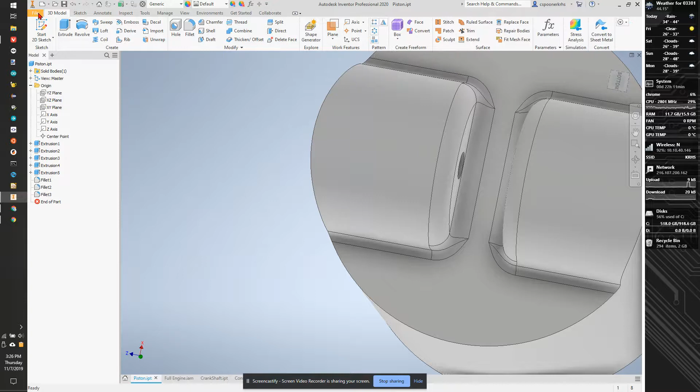So I'm going to start off with the piston. We're going to take File, Save As, Save a Copy As, STL. We don't need that. We do need the connecting rod, which is going to be special, and the crankshaft. So we open up our... hit cancel. Go to our full engine.

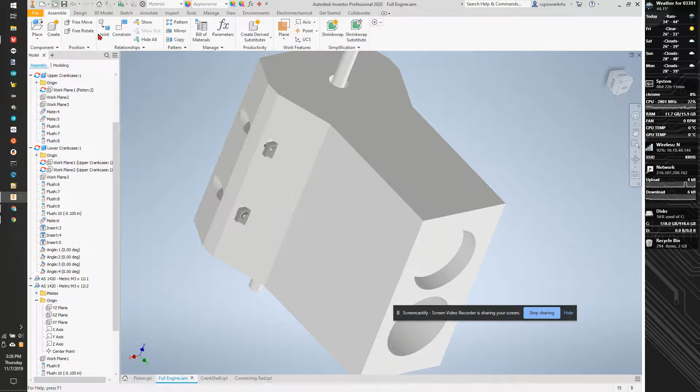Let's save this thing. It's asking me, do you want to add the save for the lower crankcase? We do. We're going to open up the upper and lower crankcase. So lower crankcase, upper crankcase. And I'm going to File, Save As, Save a Copy As, STL. File, Save As, Save a Copy As, STL.

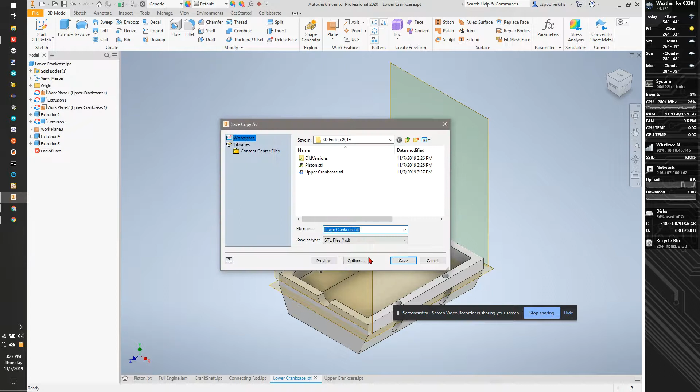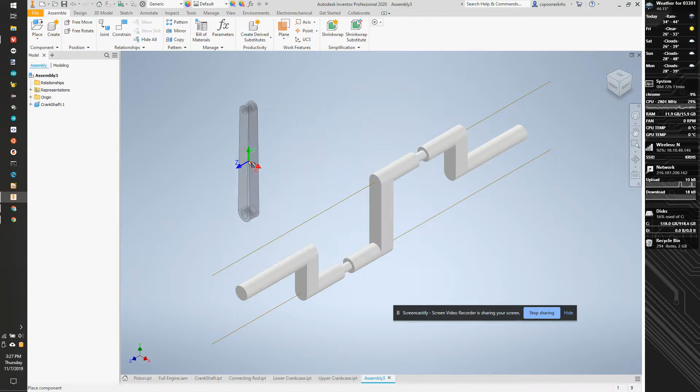And then we make a special assembly to print the crankshaft and rod. So I'm going to place the crankshaft in, and I'm going to ground him. And I'm going to place my connecting rod. We're going to place two of those in there. And we're going to constrain this axis to this axis.

Cancel, actually. Control Z, Y. Constrain. We're going to use insert just like we did last time. 0.005. 0.005. Same thing here.

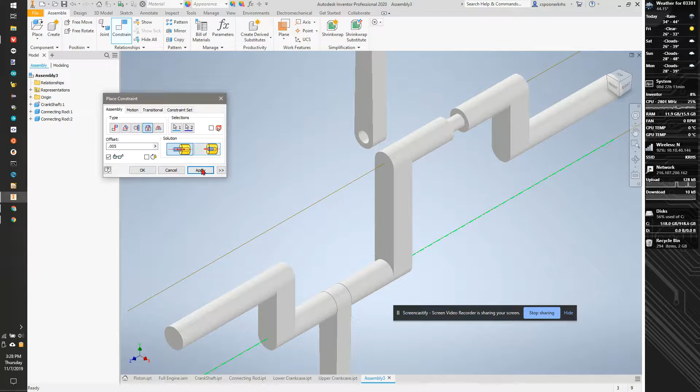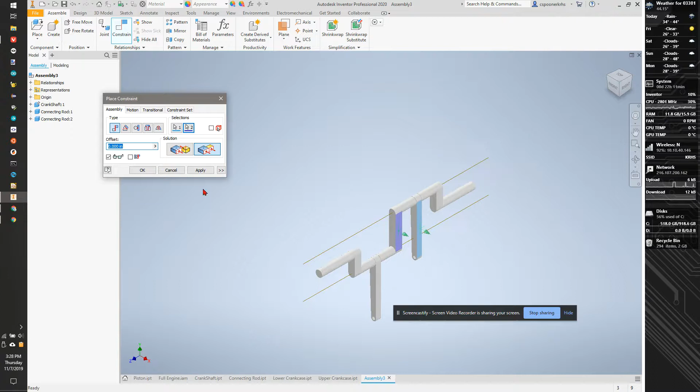And then, most importantly, we are going to flush this to this and these to this. That guarantees that we'll have a flat printing surface for this to actually run on. Notice the connecting rod is slightly tapered. If we tried to print those tapered in the middle, it wouldn't look right. It wouldn't print right. But now having these flat should let it print perfectly fine.

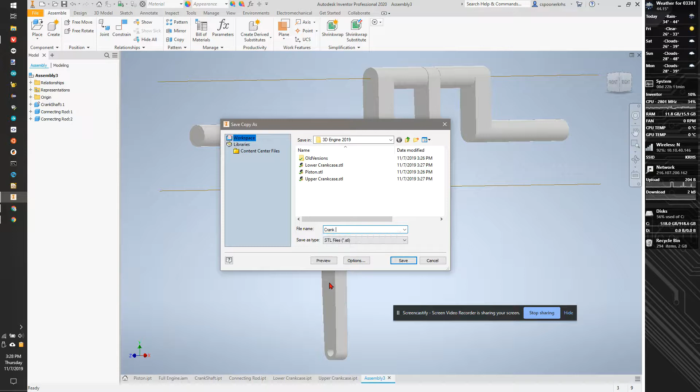So File, Save As, Save a Copy As, Crank Assembly. Let's open up PrusaSlicer, and let's see how this all gets laid out. Now, odds are some pieces are not going to fit right. What we'll do is we'll take the pieces that do fit, declare those perfect, and then adjust the other parts to fit. Like, I'm not sure if the crank is going to work. I'm not sure if the piston is going to fit properly with the engine, but I'm fairly certain the crankcases will work.

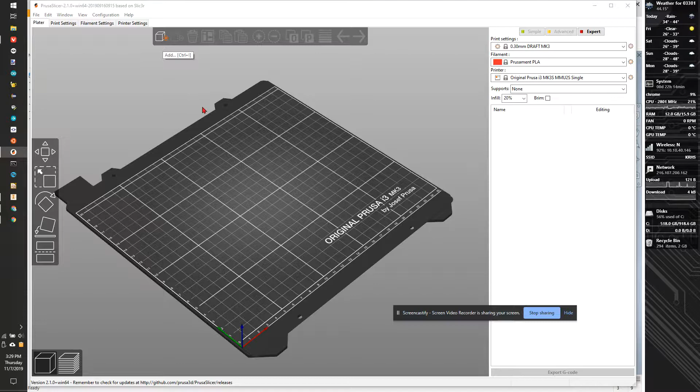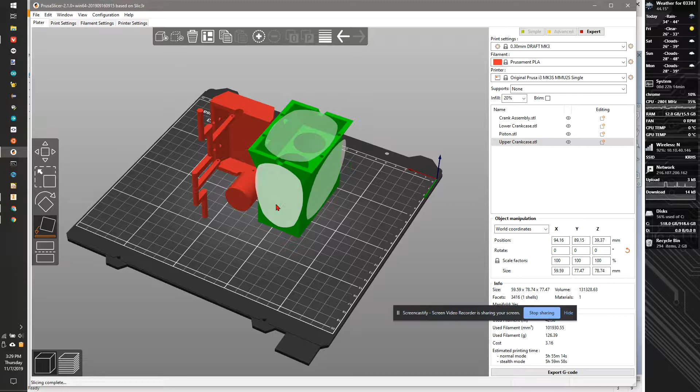So we're going to add, and we're going to go over to 3D Engine and select all these things. And we're going to hit that. And we want to orient this. So we're going to take place on face. I think we want to print this guy upside down. We want to print this upside down. This we want to print on this flat plane. And this we would like to print on its back. Let's rearrange this. We also need to duplicate the piston because we need two of those.

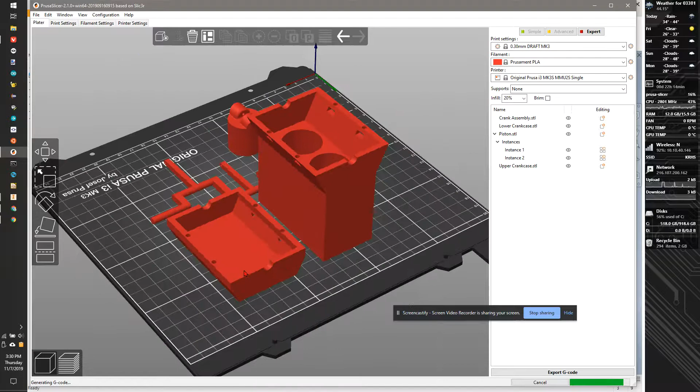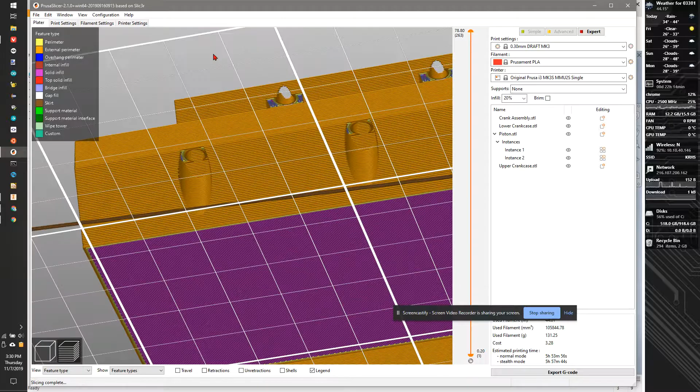So let's take a look and look for overhangs. We're going to go to the analysis view. And we see just a little overhang where those screws are. That's really printing in nothing, but it might be okay. We have some overhang for the screw holes, but I think we'll get away with it. If not, obviously, we could go and set a new version of this up with those things fixed. But this is a good starting point. We have our engine. It's a 5-hour print.

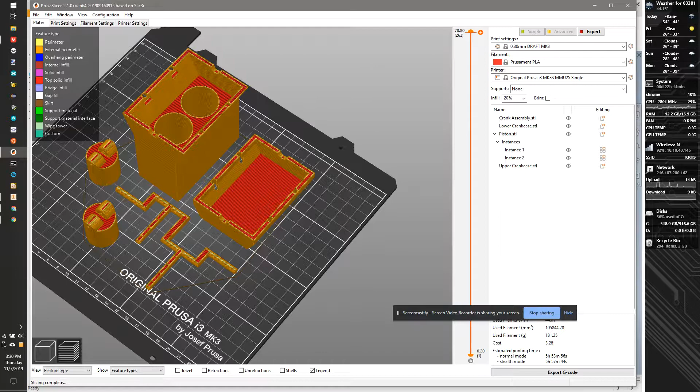And what will happen is we'll print this. We'll hope that these guys break away. So in fact, let's inspect that. I'm going to hit 1 to look straight down on it. I'm going to zoom in. So I'm looking at this joint right here. And let's see how it looks. We got a while to go before we get to it. And I'm not seeing much of a gap.

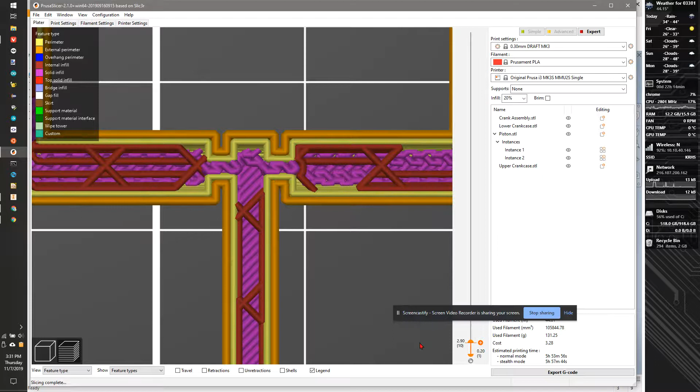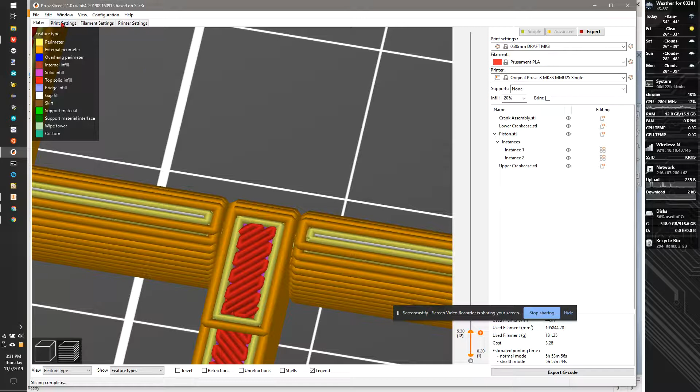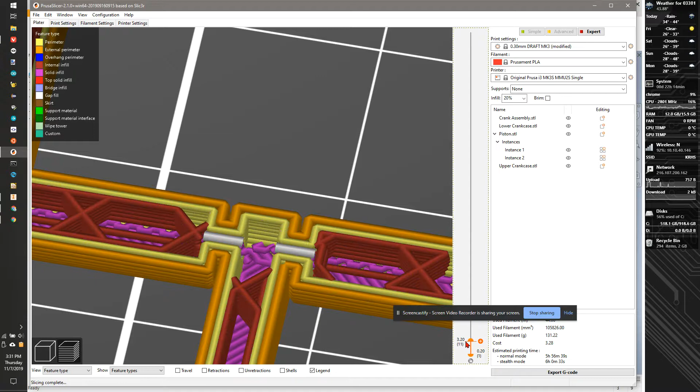So in fact, I can already see that we're going to have to redesign this a little bit, because I'm definitely not getting enough space around this to have it separate. Let's try print settings, detect thin walls, and see if that fixes the problem. It might fix it, but I'm not having high hopes. Nope. So that should go up. There should be a gap. Yeah. This should not be continuous there. So we need to go and change the tolerances on our crankshaft. Let's take care of that in the next video.